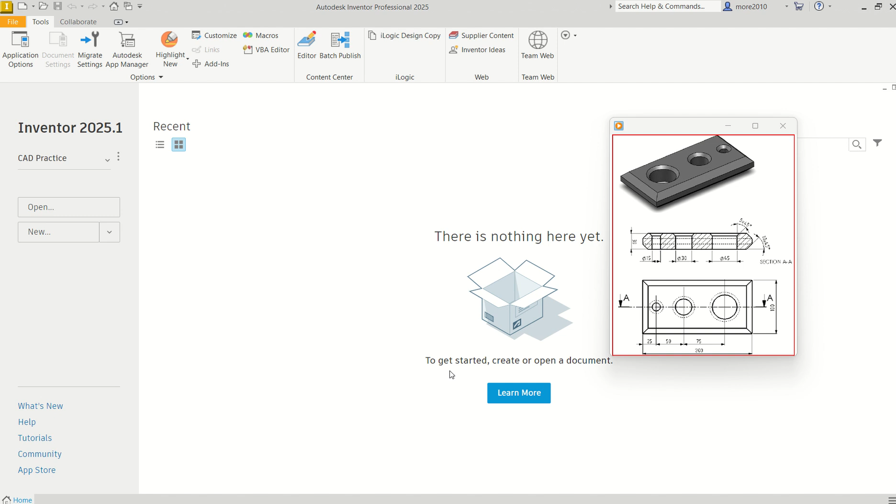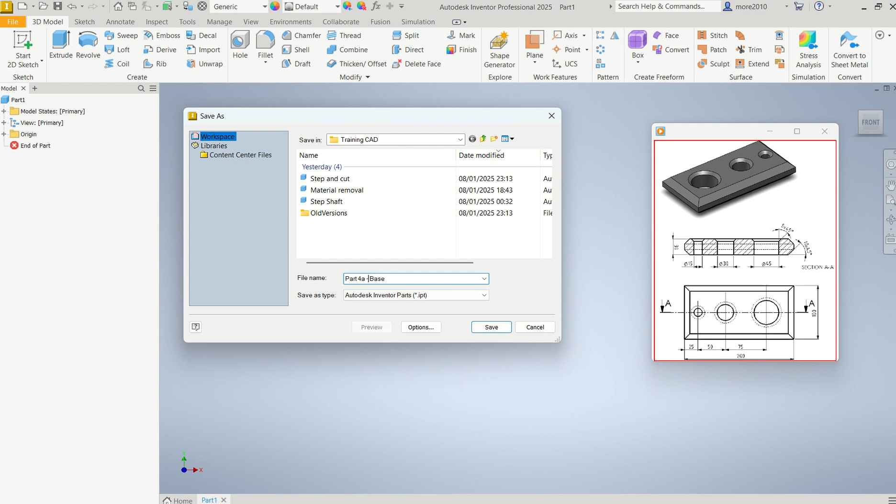So like usual, we start new, standard part, then we create. After we create, and we go in the drawing environment, the first thing we need to do is to save this drawing. That's a good habit to keep, and make sure that it is in the folder which you have created. So this one will be part 4A. So I'll make as many parts in that assembly: 4A, 4B, 4C, etc. So this will be our base. And then after that, I save and then start sketching.

Use the top plane because I want it to be horizontal, because this will be the base of the design. And then we draw a rectangle. This is called a corner rectangle because there are a few rectangles here. There is a 2-point rectangle, which is the corner rectangle, and then the center point one, and down here there are slots. So we shall use all these in other drawings.

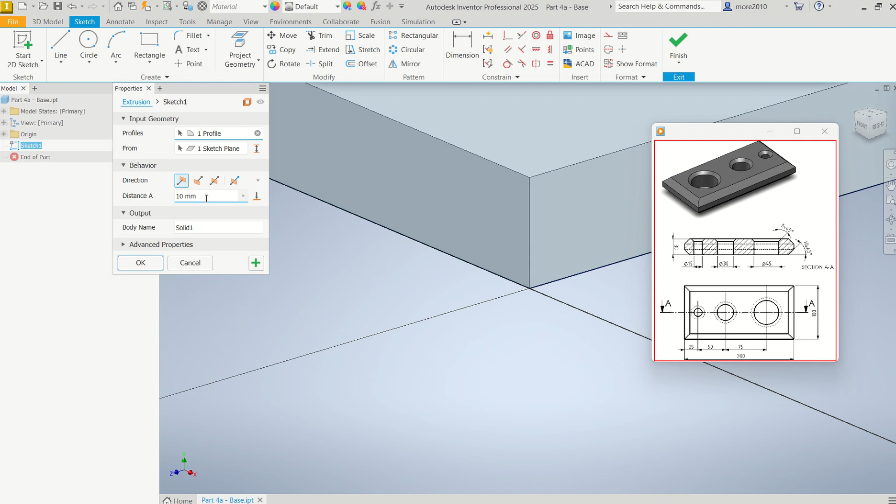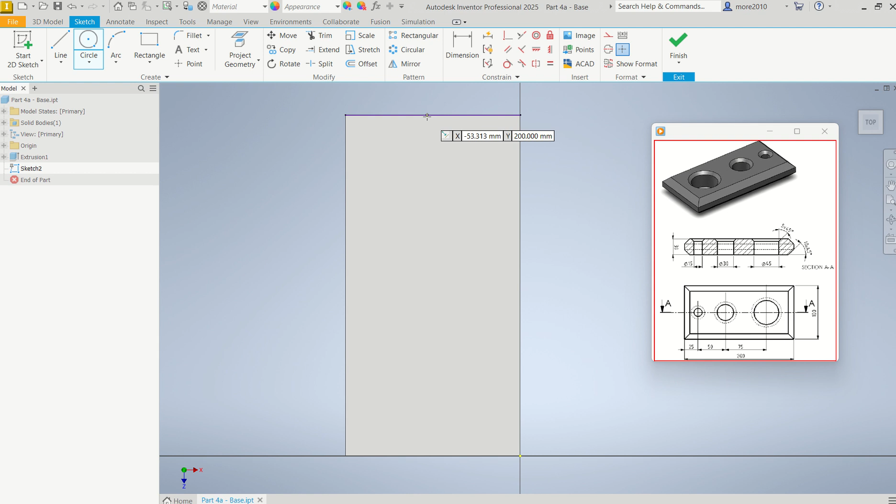We start with circles. We don't need to mind so much about the position apart from the center. So move along and track the center. When you see the center, you move down, you're going to see small dots. So you click and then put the first diameter, which is 15. And then the computer still knows that you're still drawing circles unless you cancel. You track again, go the next one, 30 mils. You track again and go the next one, which is 45 mils. So this is now the size dimensions.

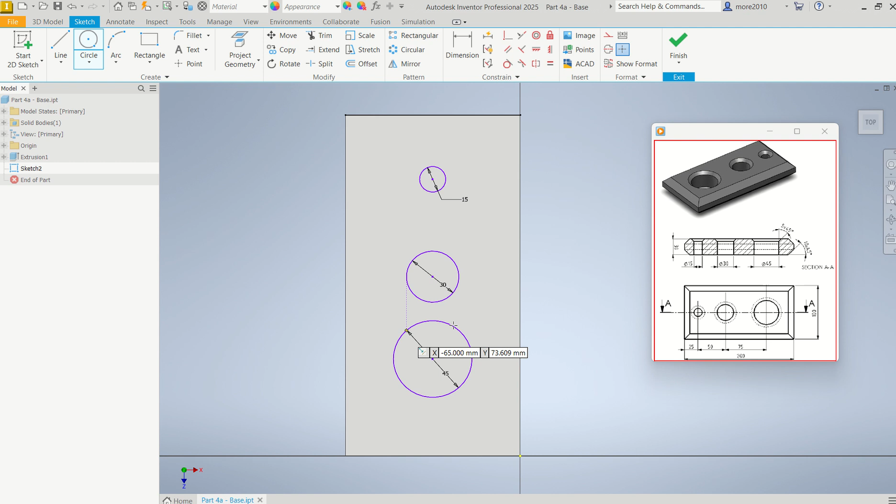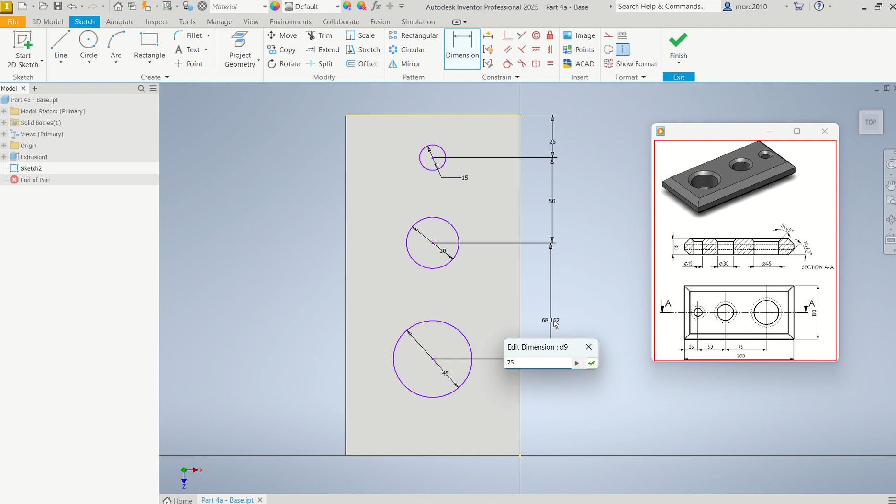After you have done that, then we go back to dimension, and now we start putting the position dimension. So this one is already in the center. So you click on the edge and the circumference of the circle, not the center, the circumference, and it will automatically bring it in the center. So that is the first one, which is 25. And then the next one is from that circle to that circle, and that is 50. And the next one is circle to circle circumference, and that is 75. You don't need to click in the center because the center will give you some problems.

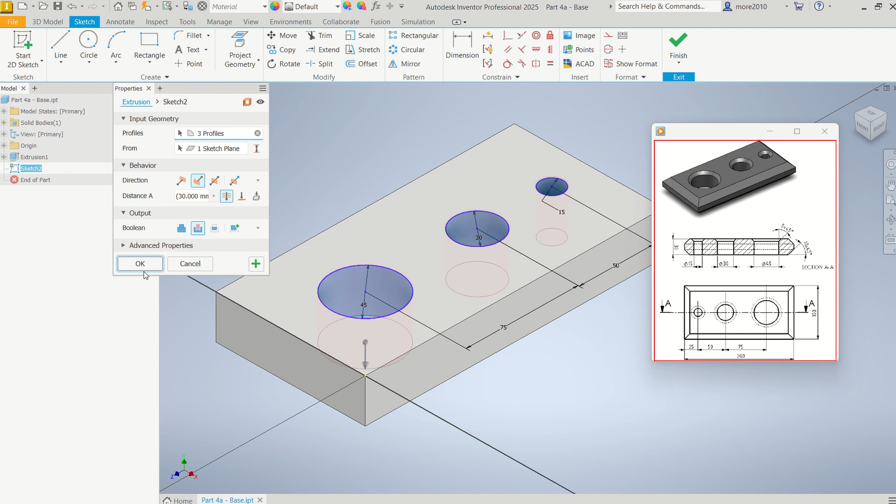There is a line there. We can remove it because that is a projected geometry, so we don't need that. So we need through holes. So all I have to do is press E and then change it to cut. Select all the 3 and make sure the depth we put through all. You can put 30, which is okay, but the normal practice is to put through all, and that will make it go through the whole length. Then we need to put chamfers.

So we realize that the side chamfers are 10 millimeters, those ones. So you just pick the chamfer tool. So here the chamfer tool. Chamfers have different denominations, but we shall not go into that now. We just want this first one, which has two distances, and the distance is 10 millimeters. So all you need to do is to touch on all those ends, and please you always do this after finishing the inside, and then you click on that one and that.

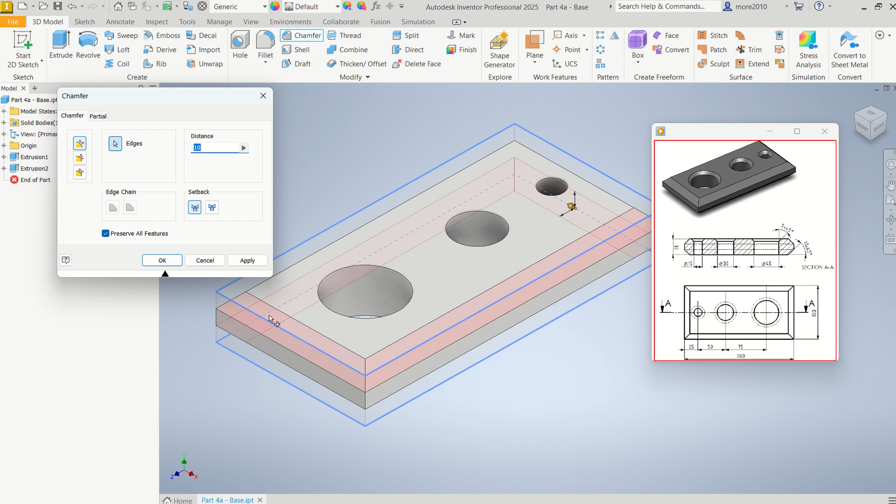You don't need to turn around, you just touch at the back there. You're going to see a green line, and that covers the bottom part, and then you apply and cancel, and if you just turn around you will see that there are chamfers on both ends. Now there are chamfers which are shown here on the top, but on the actual assembly actually they are at the bottom. So what I'm going to do, I'm going to turn this around.

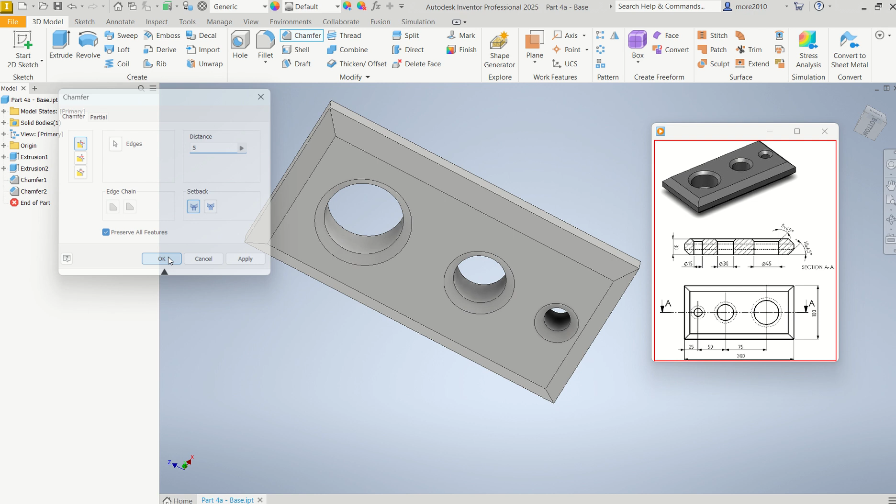Then there's a 5 mil chamfer, so I go back to chamfer, change this one to 5, and then I click there, there, and there, and then apply or click OK. Small house, and the drawing is done and dusted.